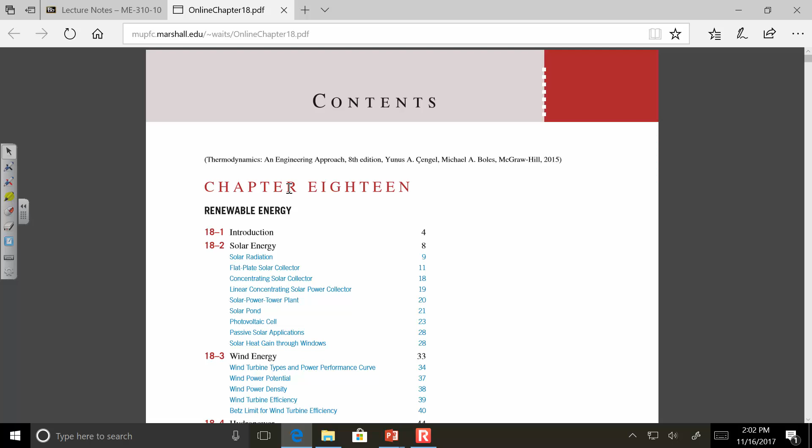And, as always, if you have any interesting articles or information about things that are happening here in West Virginia with renewable energy, then I'm happy to see them. There are a couple of new companies that have actually come in the last couple of years, which is exciting to see. So that's online, so take a look at that. And we'll finish up chapter 15, and we'll be done talking about these fossil fuels for the meantime.

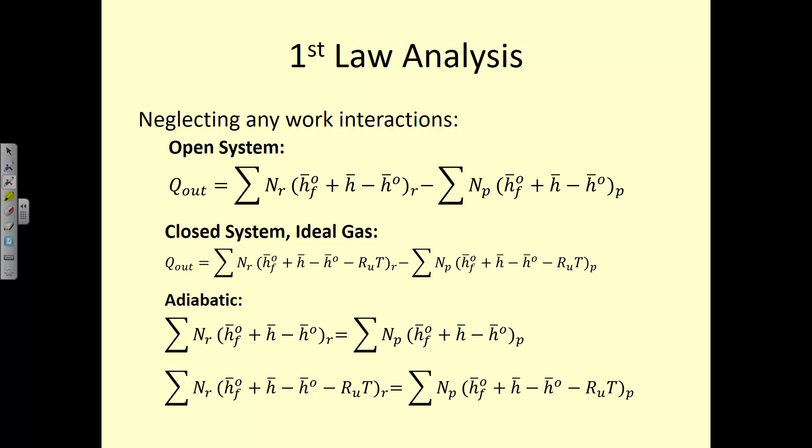So that was what we talked about last time, and we're going to move into talking about the second law analysis of these systems, because we've looked at them from a conservation of mass standpoint. We've also looked at them from conservation of energy. Now we're going to look at them and say, okay, well, what can that do for us? How much potential energy can we get out of this system? How much irreversibility is there in this system? So we're going to look at it from a second law perspective.

But before we do that, I want to go back to the last example that we did in lecture 23. And I'm not going to do the entire example, but there was a point at which we had this humid air coming into the system, and I sort of glossed over how to find how many moles of water are coming in, just because we were under time constraints. But I want to go through that example because I think it's informative and it will be helpful to you for your homework.

So this adiabatic combustion process, again, it's adiabatic, meaning there's no heat transfer to the outside, so we set the two sides of the equation equal to one another. We have octane gas coming in, and then our byproducts are going to be water, CO2, nitrogen, and oxygen.

And so in class last time, we set up the equation where we performed the balance and determined that the combustion equation, if it were dry air, is C8H18 plus 16.25 times (O2 plus 3.76 N2) goes to 9 H2O plus 8 CO2 plus 61.1 N2 plus 3.75 O2. So this is the combustion equation if we would just assume that we have dry air coming into our system.

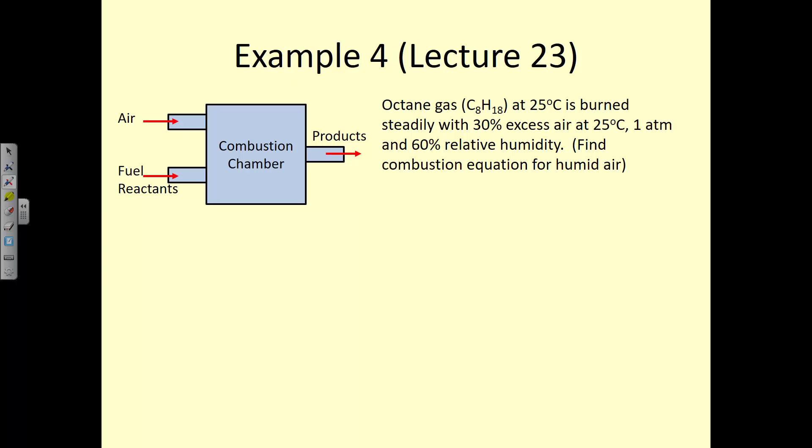Okay, so if we look at this equation, the gas constant is consistent. The temperature is going to be the same of these components coming in. The volume is going to be the same. It's occupying the same space. So we're left with this ratio of the number of moles. So the number of moles of the vapor coming into the system divided by the total number of moles is equal to the ratio of the pressures.

Okay, so now we need to find the pressure of the vapor. We know that it's coming in at 25 degrees C and 1 atmosphere. So if we go to our tables, we find for 25 degrees Celsius, the pressure of saturated liquid at that point is going to be the saturated pressure at 25 Celsius, which is equal to 3.1698 kilopascals.

Okay, so that's the saturation pressure, but what we need to find is the pressure of the vapor. And from chapter 14, the pressure of the vapor is equal to this relative humidity times Psat. So our relative humidity in this case is 60%, so 0.60 times 3.1698 gives us 1.902 kilopascals. Okay, so now we know PV.

Okay. So moving on to the new material. When we're looking at entropy change, the entropy balance for any system undergoing any process is just going to be equal to the entropy coming in minus the entropy leaving plus the entropy generated. So that's how you determine the change in entropy. That's just generic. It's for an open system, a closed system, steady flow, unsteady flow, any manner of system. We can look at it more specifically for a reacting system if it's a closed or a steady flow system.

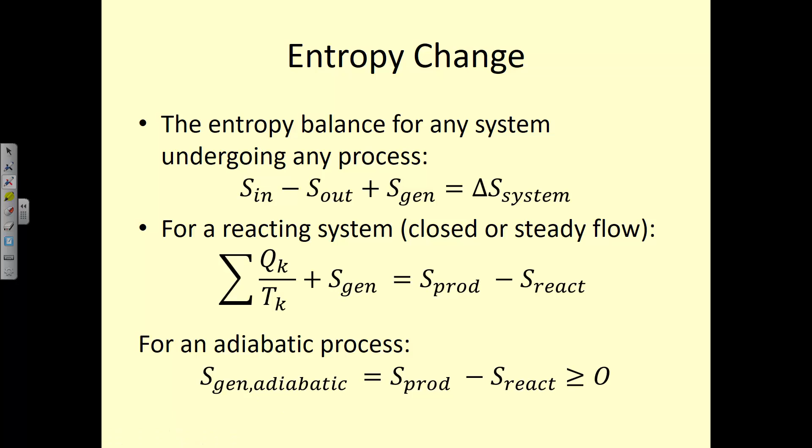Now we have this heat transfer term in our equation. So we have the sum of the heat transfer divided by the temperature at which it occurs plus the entropy generated is going to be equal to the difference in the entropy of the products minus the entropy of the reactants. And if it is an adiabatic process, then this Q term goes away, and we simply have the entropy generation is equal to the entropy of the products minus the entropy of the reactants.

To find the entropy of our products and our reactants, we have tables in the back of our book. If we look at the ideal gas tables, tables A17 through A24, we have entropy in our table, right? But what's different about this entropy that's tabulated that we need to remember? So for example, in table A18, there's entropy there, but it's written like this. So there's this superscript 0. What does that mean? It's reference entropy, right?

Okay, so it's a reference entropy because entropy depends upon temperature and pressure. But every other property of these ideal gases depends on temperature only. So for a truly ideal gas, you only need the temperature to determine the enthalpy and the internal energy. But entropy is also dependent upon the pressure, and in particular, the difference between the pressure and the reference pressure P0. So this is a reference entropy.

So in order to calculate our actual or total entropy, we have to look at this correction factor. We use our reference entropy, which we look up at the temperature and this P naught, or the reference pressure. But then we subtract off the universal gas constant times the natural log of the molar fraction times the ratio of pressures.

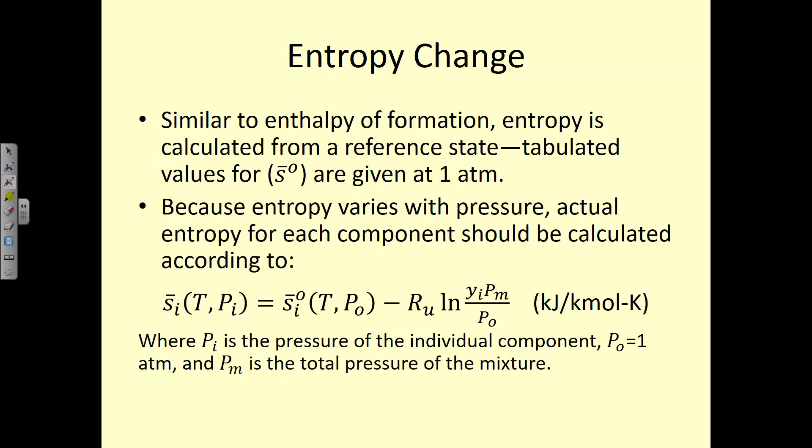So just like when we were doing the enthalpy balance, with the entropy balance, we have to be very, very careful about using the correct properties in the correct part of the equation, and then also as we punch everything into our calculator, that we're being very careful about that as well.

Okay, so knowing the entropy change automatically allows us to figure out the exergy destruction, because exergy destruction is related to the entropy generation by T naught. So if we know the temperature of the surroundings, we can calculate the entropy generation using these tables and the correction factor. Then we can also find the exergy destruction.

And in some cases, we're also interested in the reversible work. So the equation for the reversible work involves the enthalpy of formation, the enthalpy at the current state, the enthalpy of the reference state, minus this entropy term at each individual state. So this sort of is like the exergy destruction of each component, or the exergy state. Okay.

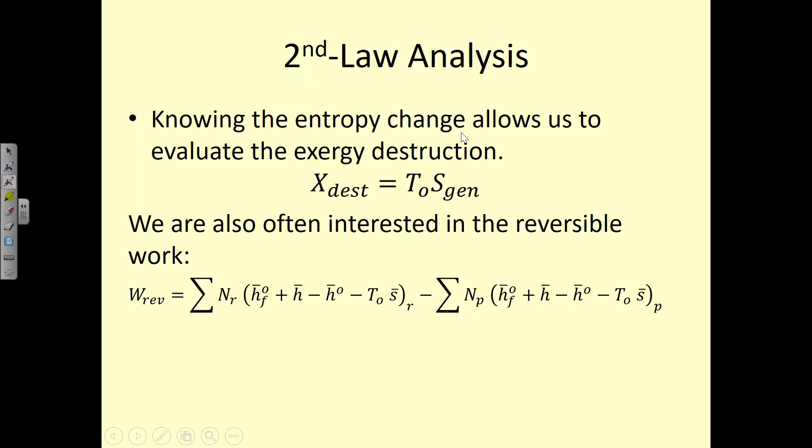Now, that brings us to a discussion of something called the Gibbs function. And if you look in table A26, you can see that for each of these hydrocarbon fuels, or in some cases just elements, there's an enthalpy of formation. But there's also this Gibbs function of formation, along with the absolute entropy at 25 C and 1 atmosphere.

So if the temperature of the reactants and the products are the same temperature as the surroundings, so if you have some dead state that's the same temperature as your products and your reactants, then we can use this Gibbs function in our calculations and in our equations for reversible work, rather than calculating the enthalpy and the entropy.

And in the case where the reactants and the products and everything is an equal temperature, then it reduces further to just this Gibbs function of the reactants and the Gibbs function of the products. So these terms will be equal to one another, they drop out of the equation, and we simply have this equation. So when they're equal to one another, we can use this general equation, and when that value that they're equal to is also 25 Celsius, which is the reference state that we use for calculating all these other properties, then those two terms go away.

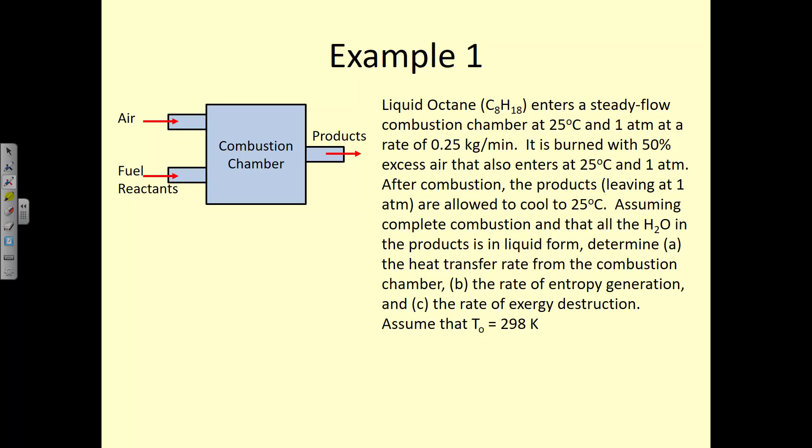Okay, so any questions on this example? All good? Okay, so you like that one, let's do another one.

Oh no! I think we're still gonna get out early today, but that's all right.

Okay, so now we're looking at this in the practical application, because up to now, we've been looking at steam power plants kind of separately, and now we're looking at combustion separately. Well, they actually go together, because the whole purpose of this combustion process, in many cases, is to add heat to another power generation process. So we're looking at that combined effect.

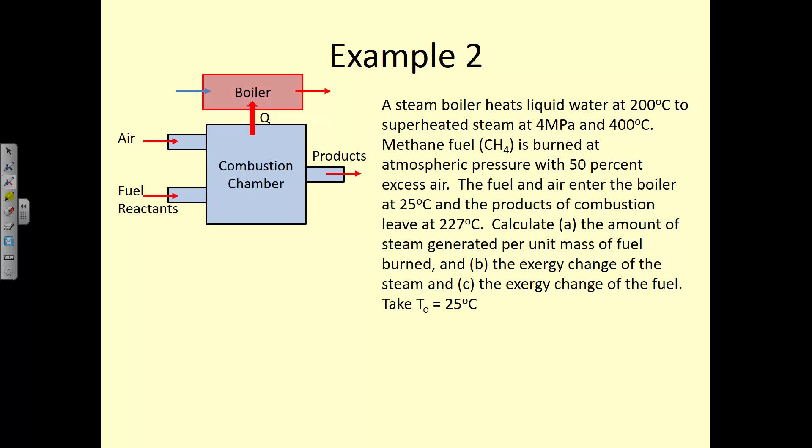So you only have one homework problem that's similar to this, but you have several homework problems where you have to calculate the heat transfer or the energy out of the combustion process.